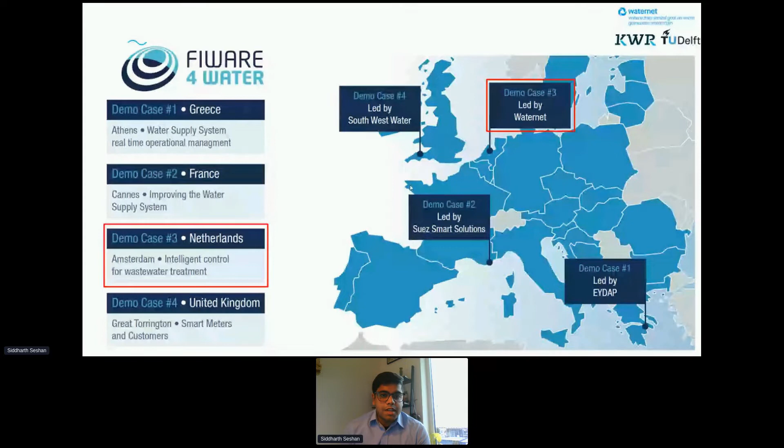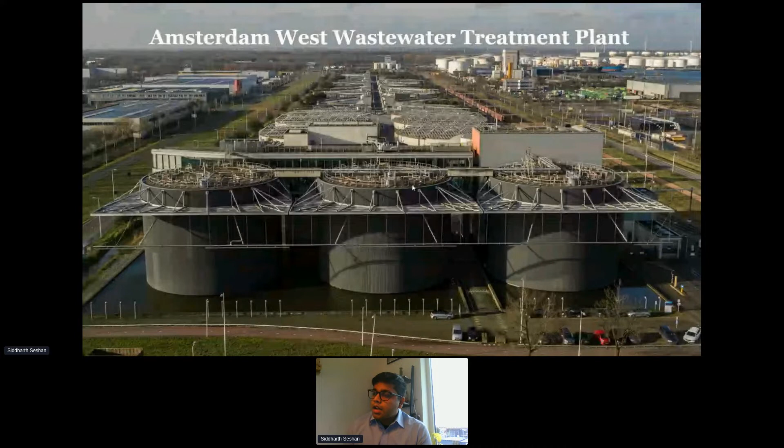So there it is, a large wastewater treatment plant. I'm sure many of you are also aware of this treatment process and system. To give background on the plant itself, it has a capacity of 1.1 million population equivalent, so it's quite large, with 7 treatment lanes within the treatment system.

The activated sludge process is a modified University of Cape Town process configuration. It's a unique plant because it also accepts external sludges from different wastewater treatment plants operated by Waternet, so it has to handle a lot more sludge than what is generated within Amsterdam West itself.

To promote and allow various research activities with various research goals, one treatment lane out of the 7 has been made available as a research lane by Waternet, where additional sensors are being deployed to test new smart technologies such as AI, to see how we can meet our goals.

One such goal, within FIWARE for Water as well as for Waternet and us as a project team, is to try and achieve the operational control of wastewater treatment plants in near real time, potentially to reduce nitrous oxide emissions, which is a very harmful greenhouse gas with a global warming potential 298 times more than CO2 equivalent.

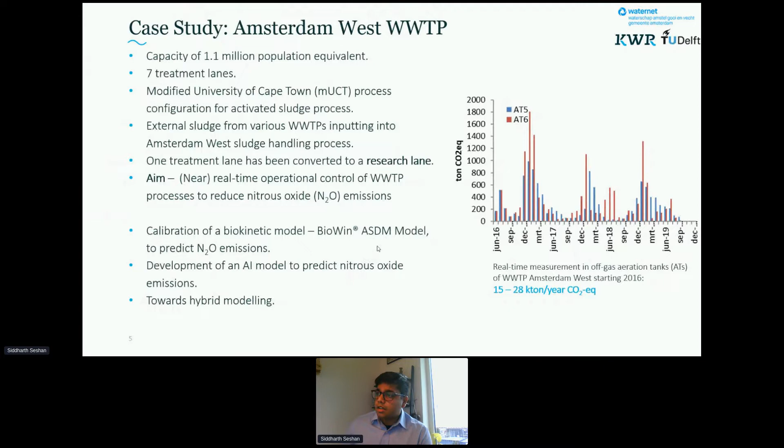So just to move forward with respect to the biokinetic modeling, prior for us to be able to do any form of simulation, we need to ensure we have the adequate and necessary data to be able to input into the model itself.

With respect to the characterization of the domestic wastewater of Amsterdam West, this was necessary to be able to acquire through a comprehensive and intensive sampling campaign. This was conducted in July of this year for 8 days during one of those sweet spots between lockdowns and regulations that were there for the COVID pandemic. So we were lucky to try and find this window.

A flow proportional daily composite sampling was conducted for the raw influent and effluent wastewater to monitor certain key parameters such as COD, total filtered COD, same for the BOD as well, total TKN, ammonia, nitrate, and the phosphorus species, as well as the solids.

The raw influent was also monitored for pH, alkalinity, calcium, and magnesium. And diurnal sampling was also conducted for the raw influent as well as the effluent specific to the research lane itself, so one of the 7 lanes.

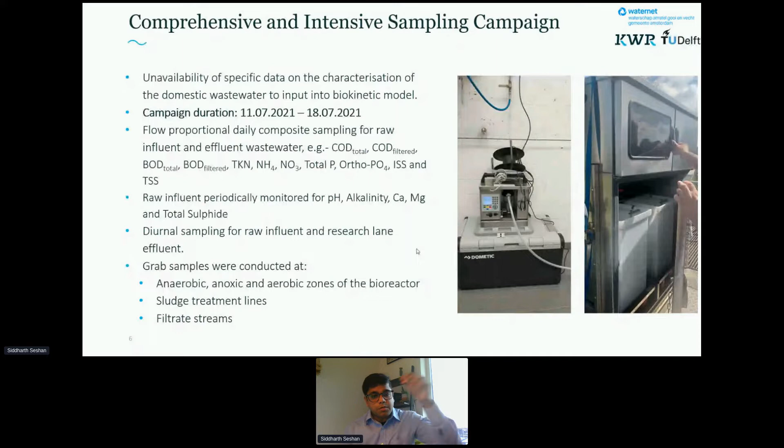And grab samples were also conducted in various locations in the treatment process, such as the bioreactor units in the anaerobic and anoxic and aerobic zones, as well as the sludge treatment lines, which is quite important as well, and even the filtrate streams, which is also providing certain wastewater characteristics back into the activated sludge process.

This is just to give an overview of the different locations that we tried to capture in our sampling campaign and monitor. So we had various locations from this aerial view shot of Amsterdam West. As we can see, there were quite a few locations in the sludge handling processes for grab samples, bioreactor units, the raw influent, and the effluent.

And more importantly, in the bottom left corner, you could see the external sludges. So we had the external primary sludge and thickened sludges from different wastewater treatment plants, as well as waste activated sludge that is inputted. So we also had to monitor these sludge lines to be able to understand what we can input into our model.

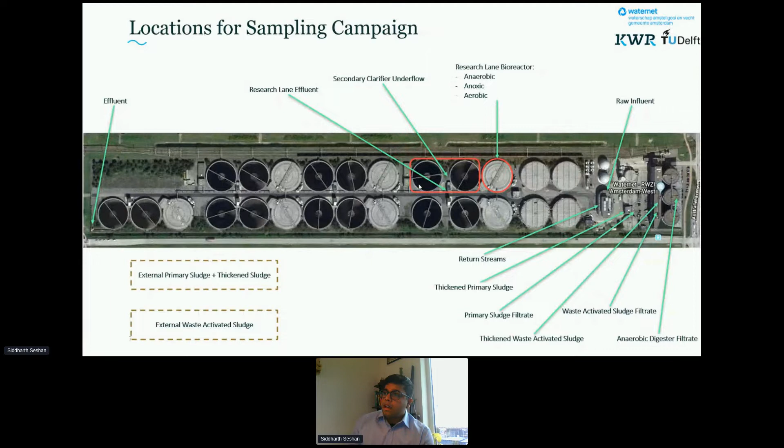Here's also another overview of the different various parameters that we also monitored. So it is quite an extensive list where we try to take as many, try and understand our samples as much as possible, gather as much information as possible to allow us to be able to input and as well as cross-check the outputs that we get from our biokinetic model.

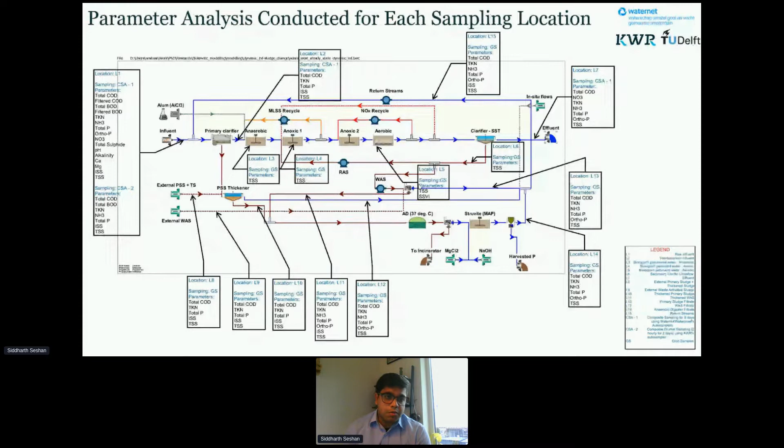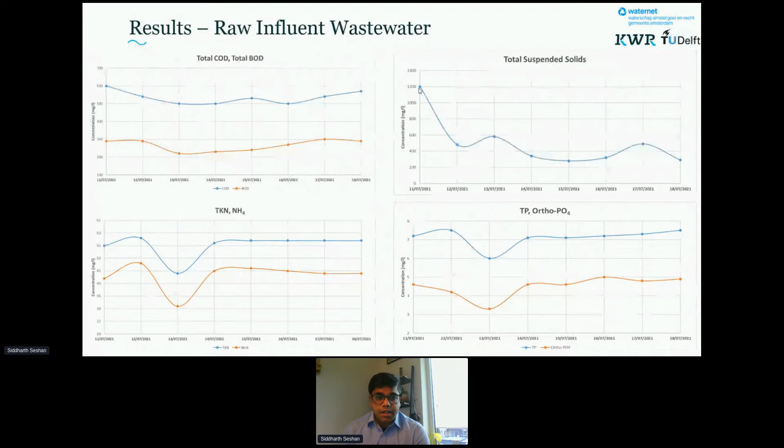Here's some figures on the raw influent wastewater from the sampling campaign. Barring some hiccups, which is bound to happen in a sampling campaign of this magnitude, where we did have some questionable values, for example, of the total suspended solids, as a whole, we believe that what we got is what we expected, and the data was sufficiently good enough for us to be able to perform the characterization of the wastewater specific to Amsterdam West, so that can allow us to conduct the modeling.

Now that we have the data from the sampling campaign, we can now do some modeling using the BioWin ASDM model. The sampling data, as I mentioned, was used to characterize the common quality parameters such as COD, TKN, and TP into their fractions. So now we have a list of the wastewater fractions that can now specifically be entered into BioWin that are specific and unique to Amsterdam West, the domestic wastewater of Amsterdam West, to be more precise.

The grab samples of the sludge lines were also used as input into the model, for example, in the external sludges. And it also was used to perform sanity checks throughout the sludge lines to ensure that the model outputs that we were getting from the simulations are somewhat in the range of what is actually what we see in the ground. Of course, the dimensions of the process units were also inputted for the treatment lane.

The recycled flow rates, so the MLSS recycles, as we can see over here, the NOx recycles, typical recycles that you have in an MUCT platform process configuration was also inputted. The liquid temperature was also inputted that allowed us to do season-based simulations. So we started off with doing the summer season to be able to ensure our model provides a good fit in that. And then we subsequently move to different seasons as well.

And we started off with doing steady state simulations, as is the practice prior to going forward with dynamic simulations. The recycled flow rates and the liquid temperature, for example, were inputted using online sensor data that is available in the Waternet system for the research lane.

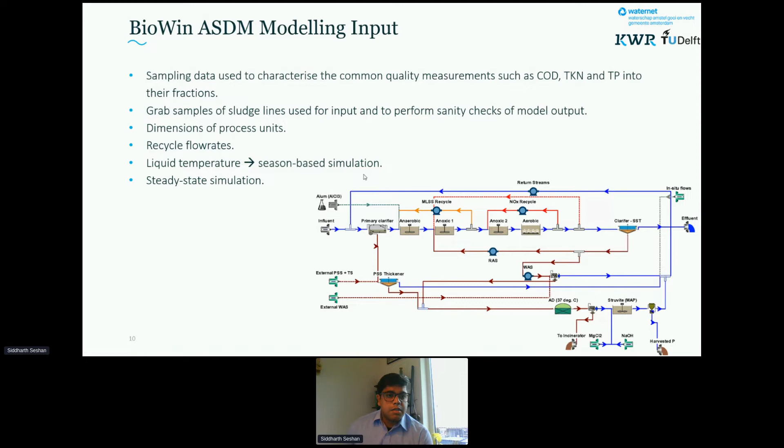Here are some first results of the steady state simulation that we did with the BioWin model. As I mentioned, the steady state simulations were conducted seasonally using historical laboratory measurements for calibration. We observed a good fit between the observed data and our model predictions for the various effluent variables during the summer season. This gives us confidence that our sampling campaign provided adequate data for characterizing the wastewater, which we can now use to conduct steady state and dynamic simulations for various seasons moving forward.

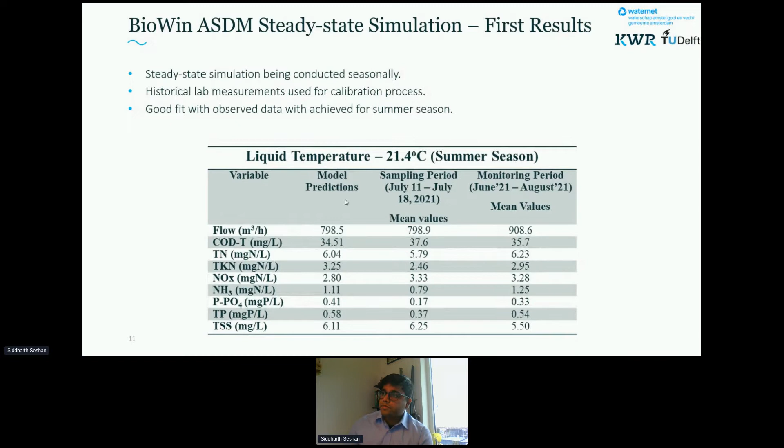To wrap up, an outlook on the sampling campaign itself: we conducted 8 days of sampling, balancing the costs of going too long against collecting sufficient data for a meaningful understanding of the wastewater in Amsterdam West. We also tried to increase data redundancy by focusing on various samples and locations, so that in case unforeseen situations arise, such as a pandemic, we would still have sufficient data points to continue the analysis.

Amsterdam West is a rather large plant with a lot of complexity due to external sludges, and a monitoring campaign of this magnitude was time consuming and complex, but it was a great learning experience in developing a framework for how to conduct such a monitoring campaign. The primary goal of characterizing the raw influent quality parameters with the fractions was achieved, allowing us to map it in the BioWin model.

For future modeling activities, we will continue doing steady state simulations for other seasons, and also continue with dynamic simulations using online sensor data now that we have the wastewater fractions. This biokinetic model, once calibrated, is a prelude to being calibrated on N2O, nitrous oxide sensor data, which will be followed by AI modeling of N2O predictions. Finally, investigations will be conducted on how to hybridize these models.

I think this hybrid model is very interesting. But can you also indicate what you expect as the crucial parameters to control or reduce the N2O emissions? What is your assumption prior to doing all this modeling? What would be your guess as to the crucial parameters?

Yes, very nice question, Huub. In fact, what literature has suggested, and what we are seeing, is that dissolved oxygen is a very important operational parameter, particularly the DO levels in the aerobic zones as well as the anoxic zones, because that gives an indication of which production pathway of the N2O is active. So controlling DO and understanding how it changes with respect to N2O production is a very key parameter for testing these strategies with our biokinetic model. I would say that's number one.

But after that, there are also other things sporadically mentioned in literature, such as the pH of the mixed liquor, sludge retention time, and so on. But I think DO is your number one go-to before you can start considering the rest.

So then you predict that the transition between the oxidation part of the treatment and the nitrification part, and perhaps also the denitrification, is crucial. So you have to maintain very sharp treatment conditions with respect to oxygen to limit the N2O emissions.

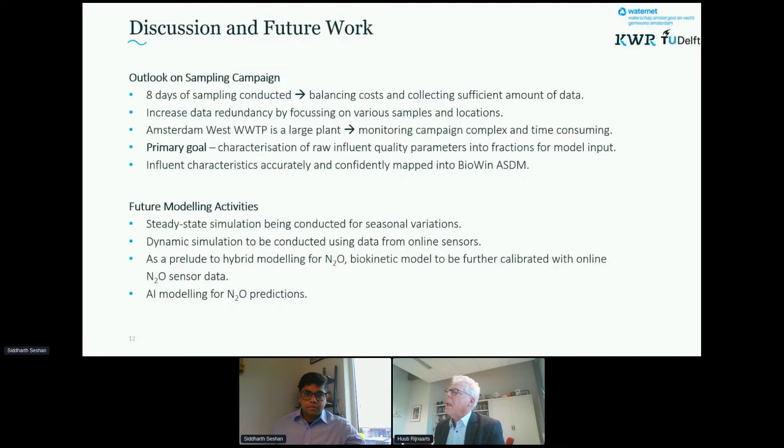Let me check whether there is something in the chat. I don't see yet. Maybe another question.

So you have, of course, N2O as one of the greenhouse gas emissions, but you also have methane and CO2. So you have the three major greenhouse emissions from wastewater treatment plants. Do you foresee that your hybrid model can be expanded to all the greenhouse components? Yes, I think so, because at least the biokinetic models are mass balance based. So you do have to account for this when you add the complexities for the other greenhouse gases as well. A very unique thing about Amsterdam West and what Waternet have done over there is they are also measuring the methane and the CO2 in the off gas. So there is data available to also extend past the N2O. But I think N2O is considered the most potent one to start with.

And then it will naturally be extended. I think there is scope for that, and also the indirect carbon footprint from the energy consumption as well. So this is also another important thing.

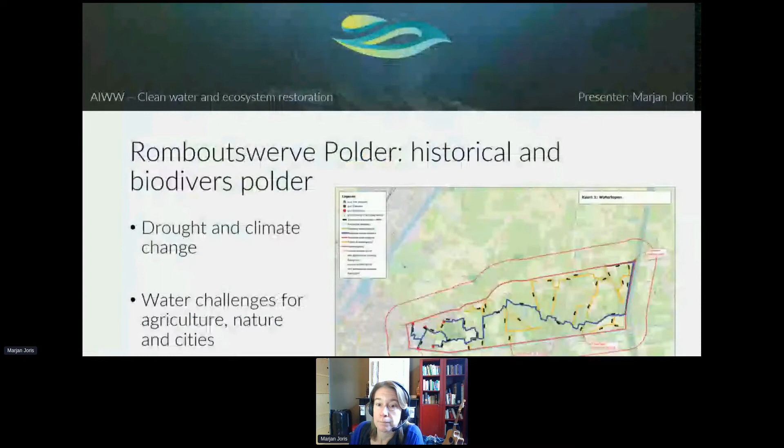The Romboutswerve Polder is an old polder or reclaimed land, limited by canals and crossed by different waterways. Although the canals can feed the waterways even in summer, drought is a problem in this area. Because of the low water levels, quality of the water can be poor, and the growth of blue algae does not allow taking in the water of the canal at all times.

We expect that due to climate change, temperatures will rise and there will be longer periods of drought. On the other hand, during heavy rainfall, water must be drained to prevent flooding in the upper urban areas, in the city of Damme, as well as the city of Bruges. Also due to climate change, we expect an increase in events with high to even extreme precipitation. So the possibilities to retain water in the area are limited.

At the moment, the water system is disturbed, and even in winter, there are hardly any puddle and swim conditions, which is crucial for the meadow birds, and the population of these birds is drastically decreasing.

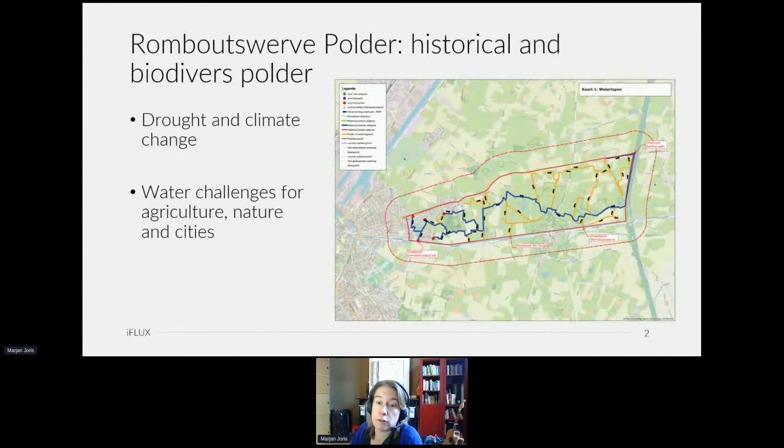To counteract the effects of drought, the aim is to raise the water level, although more is needed to come to a sustainable water management that's optimally attuned to nature, but also agriculture, and to prevent or avoid flooding in the urban areas.

The aim is to optimize the water management in the Romboutswerve Polder, tackling the challenges of drought and flood, realizing a climate-robust and optimally functioning water system in connection with agricultural land use, conserving biodiversity and water experience, promoting good water quality as a precondition for top international nature and as an indicator for sustainable agriculture management, preserving the cultural historical landscape, and promoting added value through smarter management and exploitation in a climate-robust and biodiverse way.

So the pilot monitoring network helps to collect and exchange knowledge about the complex water system. Where in the past, monitoring was limited to measuring the effects at the surface, we want to visualize what's happening in the underground by measuring the groundwater flows and exchange at the interfaces of ground and surface water, but also of precipitation that goes through the groundwater, etc.

By monitoring, we like to organize a collaboration of partners and an interactive project approach with various stakeholders. The focus is on differentiated water level management and innovative water retention and infiltration initiatives, distinguished in design, technology, and the target audience.

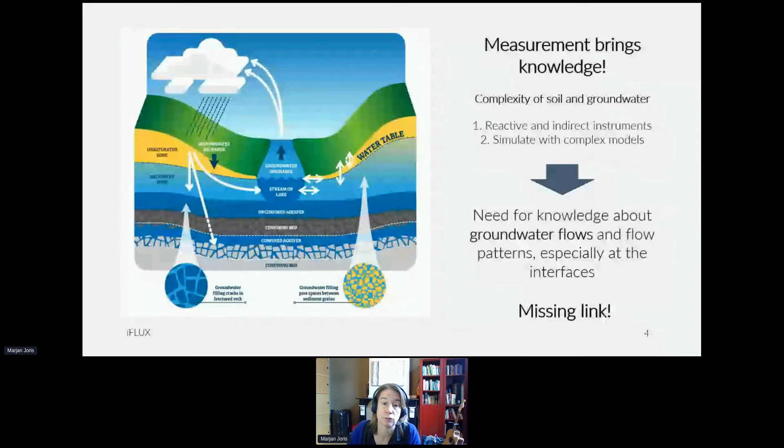With iFLUX, we provide real-time data of groundwater and contamination flux. It all started a while ago, around 2007, with a PhD about spreading of contamination in groundwater. It's a PhD of our founder, Goedele Verreydt. And out of that PhD, iFLUX was born.

We have done more than 100 projects investigating the fate and behavior of contamination in the groundwater. Based on this experience and the questions of our customers, we developed a digital smart groundwater sensing probe, including a unique sensor flow chip inside.

We are able to measure continuous groundwater flow rates. We measure specific low-flow groundwater ranges down to the centimeter scale a day, typical to Flanders, but also to the Netherlands and other areas with typical low flows in groundwater.

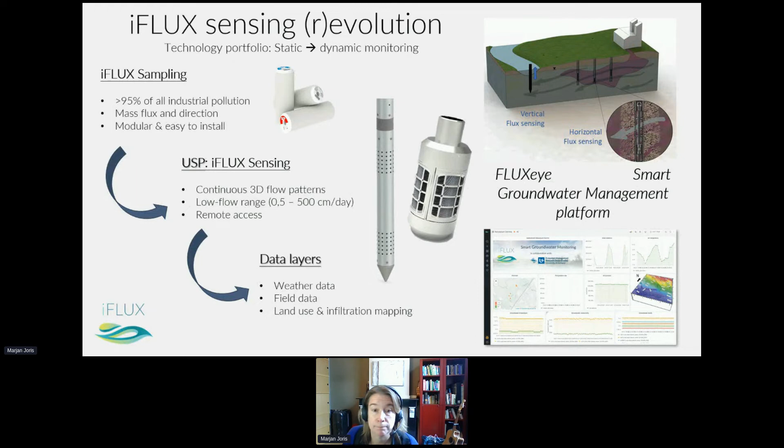So here you see our vertical sensor probe. In the sensor probe, there is a microfluid chip with a small sensor capillary measuring flow velocity based on temperature in a closed well system.

The sensor is built in a probe, and the probe has two filter areas, provided with a fine mesh to prevent clogging. The probe can be installed directly in soil or in a specific well, allowing measurement of the vertical flow.

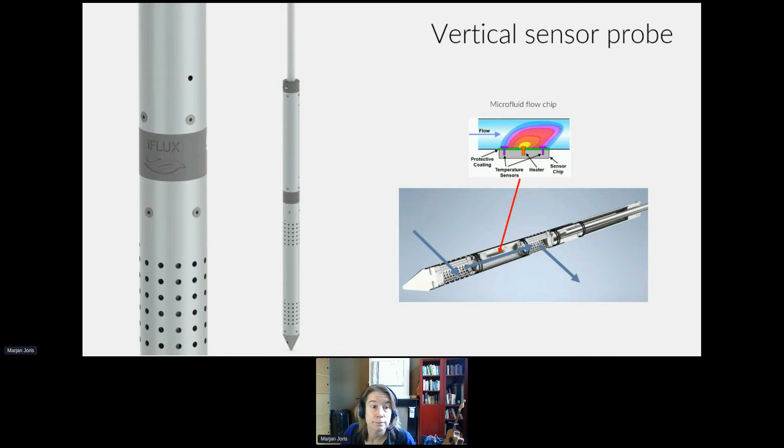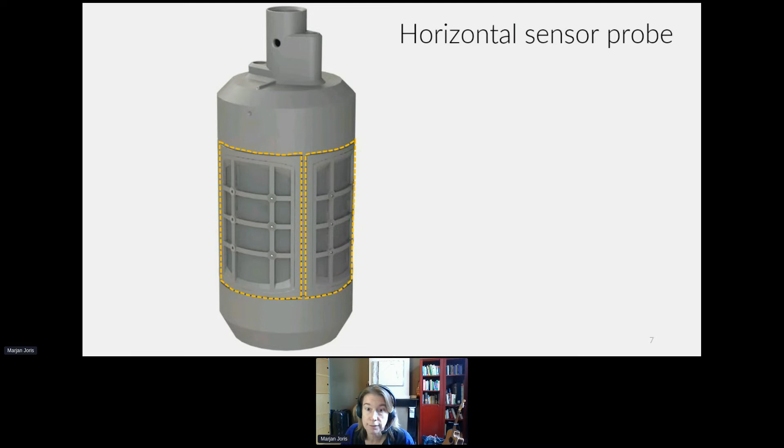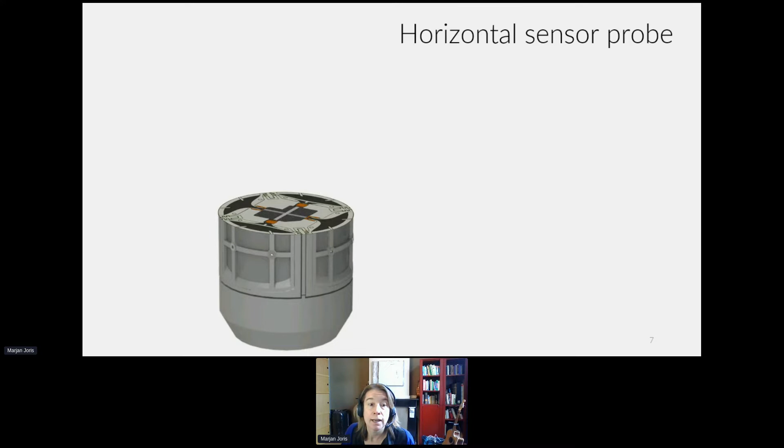Here you see our probe for measuring horizontal groundwater flow. These are the meshes where the groundwater flows in, and if we open it, you can see there are two sensors perpendicular to each other. Those two sensors allow us to measure the flow velocity, but also, based on the vector sum, the direction is determined. And this probe, as you can see, voila.

This probe is installed in a well. For the best results, we prefer to use our own specially designed pre-pack filter, because that way the flow is optimally controlled.

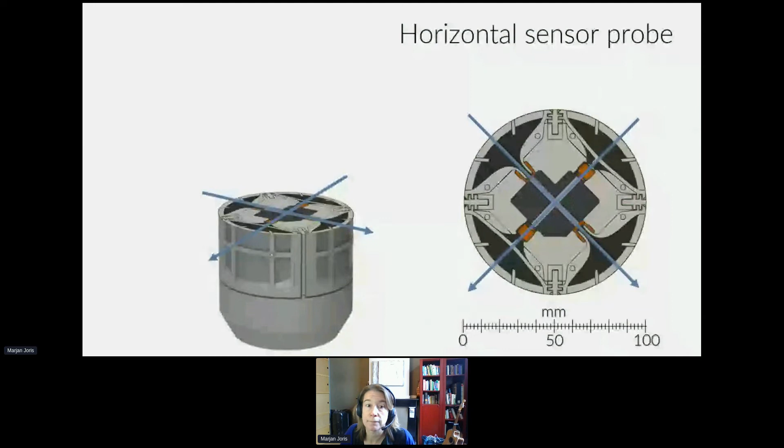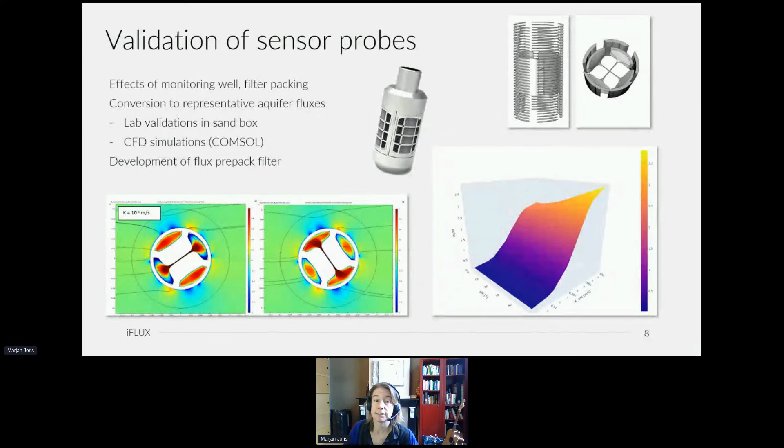To determine the flux in the aquifer, the sensor measurement is converted based on the characteristics, the conductivity of the aquifer, the well, and the probe. A correction factor is calculated, and for this, controlled lab tests are executed in a sandbox. And because of the limitations of lab setups, additional CFD simulations are done in our digital lab.

To come back to the pilot in Damme, together with Natuurpunt and the University of Antwerp, we set up a first monitoring network to create a better understanding of the water system, to restore wet grassland and swamp forest, preserving and restoring biotopes.

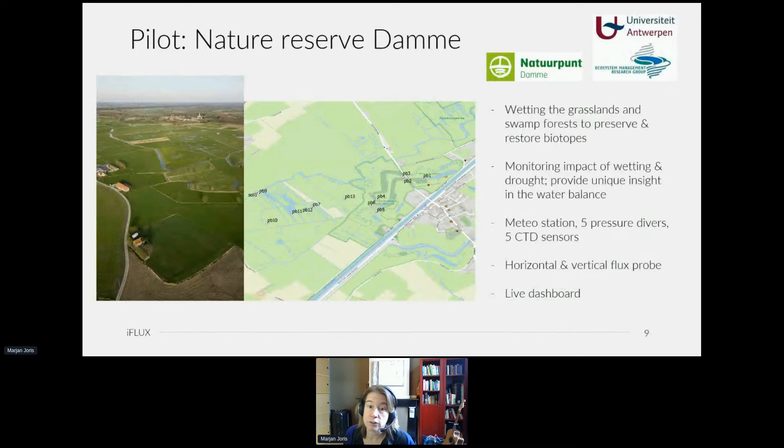For this, we installed a meteo station and 5 pressure divers and CTD sensors, a horizontal and vertical flux probe, and all data are sent to a real-time dashboard.

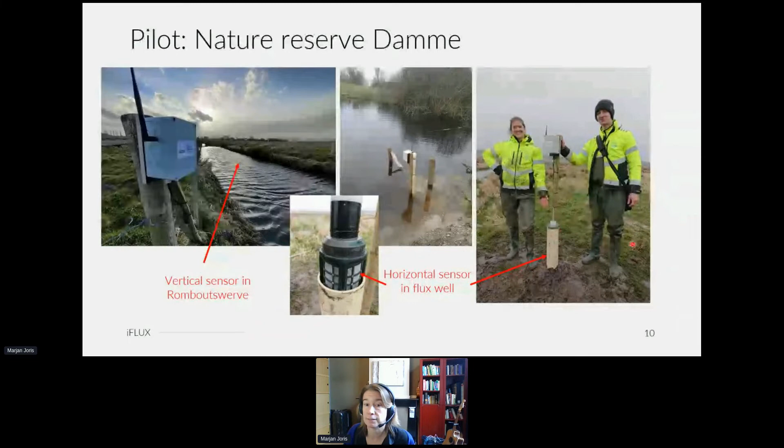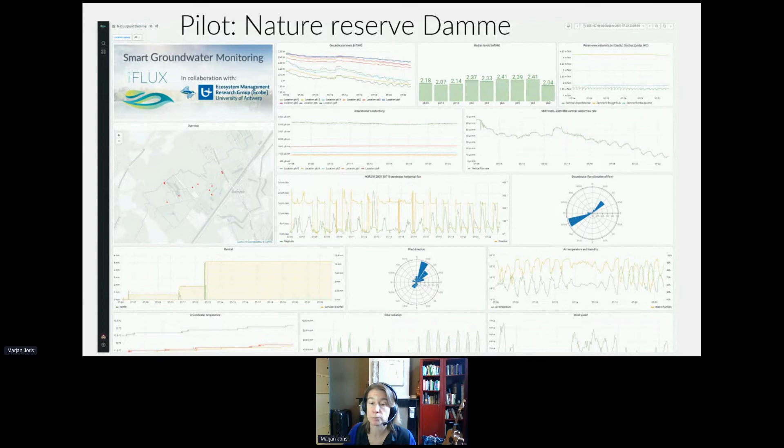We combine those data with the information from the weather station, measuring solar radiation, wind, humidity, and precipitation, and we combine our own measurements with available data of level measurements in the water base, which we download from waterinfo.be. So let's come to the first findings of our pilot test.

We see a variation in flow velocity and also in direction. It's not a surprise, of course, but in contradiction with expectations, the change is not directly related to the tide, or not only related to the tide. We see only one change in direction a day. If it were related to the tide, we would expect more changes a day. It's more a day-night related change.

Further investigation is needed to find out if there is influence of evapotranspiration or maybe the nearby canals. We also see that with the change in direction, the vertical flow respectively increases and decreases.

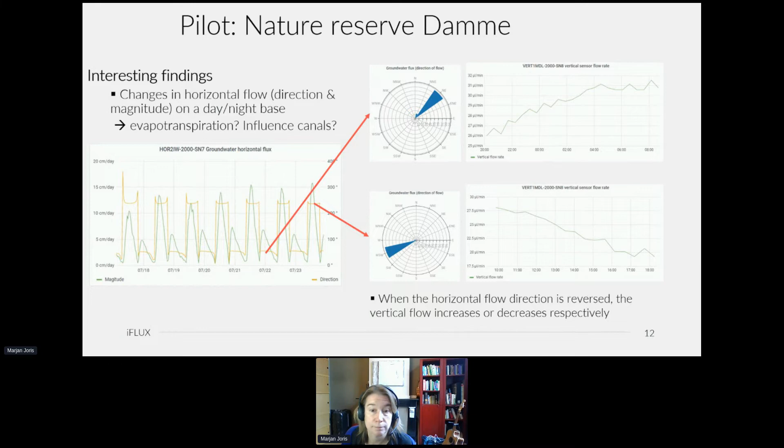Okay, and here you can see for the vertical flow, there is an increase and decrease, but we see there is always a very strong natural exfiltration. We notice now that this natural exfiltration is much higher than the water artificial discharge supplied by pumping.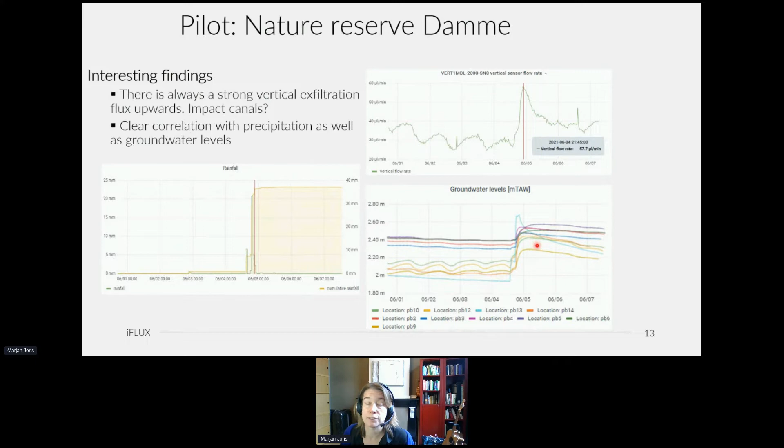The exfiltration is clearly correlated with the precipitation. You see precipitation, and we see an increase in the vertical flow, and also correlated with the measured groundwater levels on site.

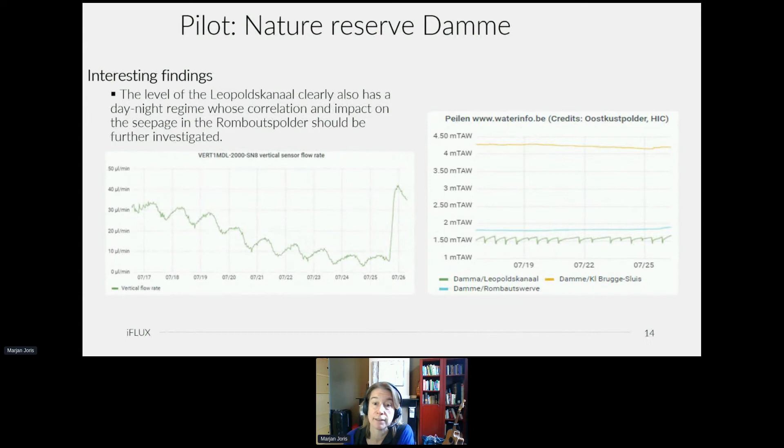And we see that the changes in the vertical flow are very similar to the level variation in a canal further away, where water is discharged to keep the water level high. It's in the Damme Leopold canal. We can see it here.

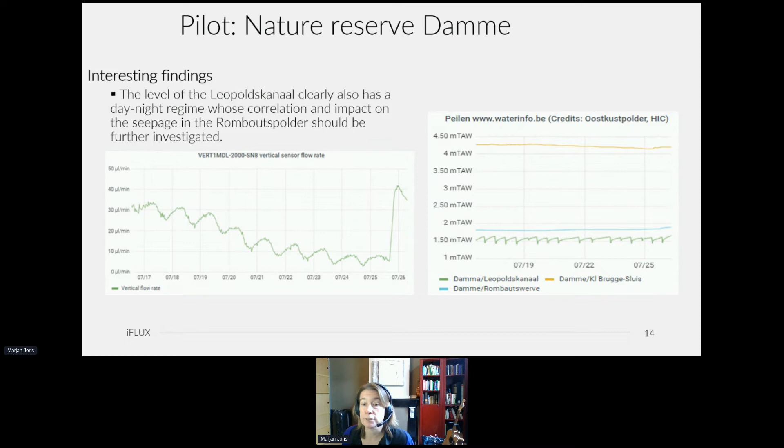While we don't see the variation in the nearby canals, here in the Canal Brugge-Sluis or in the Romboutswerve, we don't see the variations. So the seepage from the Leopold Canal to the Romboutspolder should be further investigated.

Thank you very much, Marjan, for your nice presentation on a polder in Belgium. I would again invite the audience to raise any questions if you have for Marjan. At the moment, there are no questions yet, so I have a question to start the discussion.

So you are completely oriented with your sensoring on water quantity, the water quantity flow modeling of the system. Do you envision also that these sensors can be expanded to sensors that are also able to pick up water quality parameters like salinity, nitrogen and phosphorus, because these are important parameters for the ecological and agricultural quality of the system?

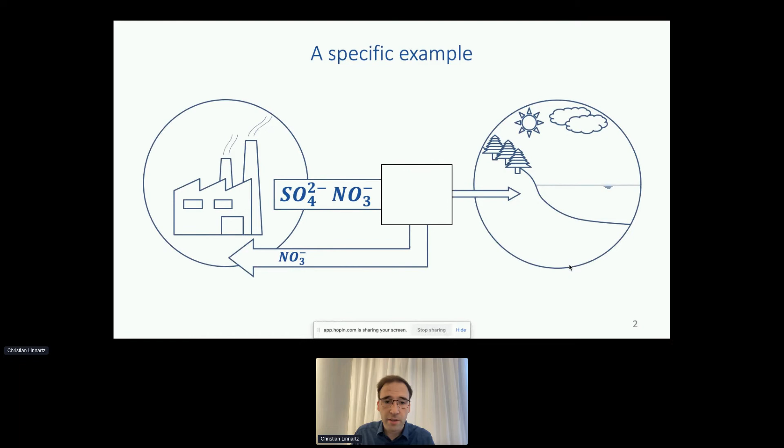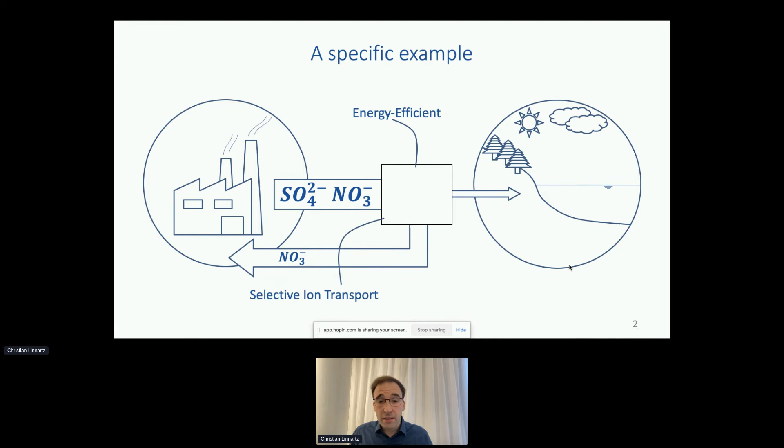The question is, how can we feed those back? And sometimes you don't just want to feed back those ions, you want to select the ions—separate sulfate and nitrate, for example, under these conditions. This should also be energy efficient, as we all know, because that's what drives our industry. We need this kind of selectivity in the system, in the black box I'm showing here, to separate, for example, nitrate and give it back selectively, and then go with the sulfate in a separate step, or give it back to the environment or to another industry.

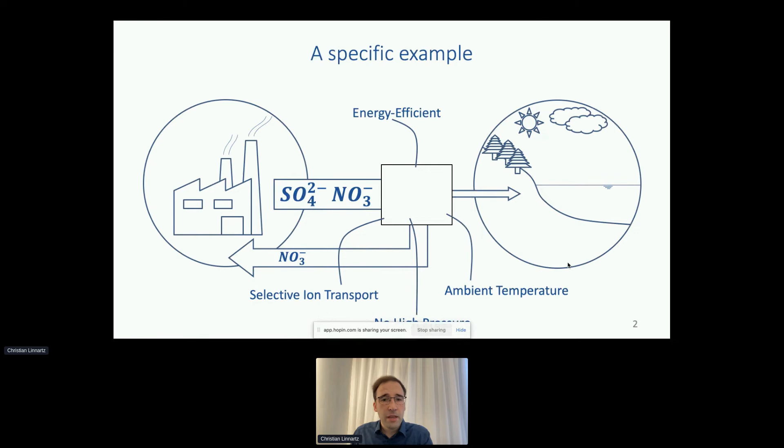This should also usually be done at ambient temperature, mainly due to the cost of high-temperature systems, and it should also be with no high pressure—which, in the specific case we have, is an industry project on biosecurity regulation. When we think about that, we need to think not just about selectivity and energy efficiency, but also about robustness.

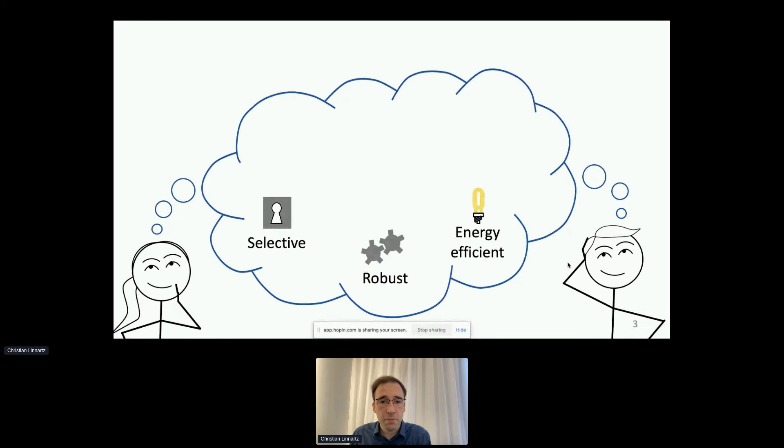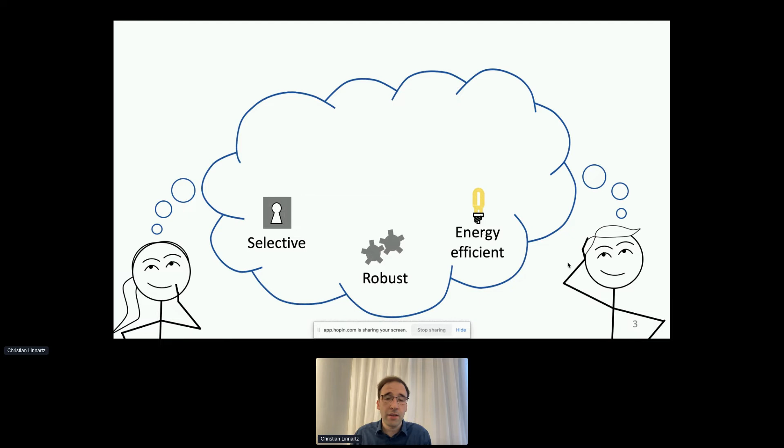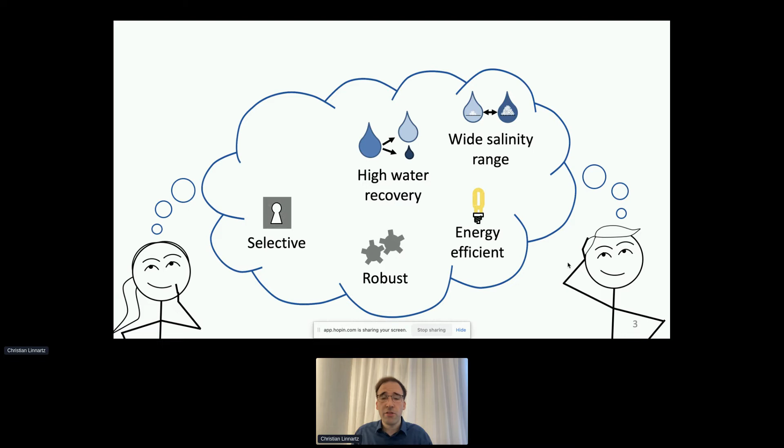We were talking about the big plants before, and you all know that when we work on such a system, it's not just about being in the lab—it should also go into industry, and there it should run like in a sewage plant for years and years, staying stable for a long time. What we always want is a high water recovery rate so we can harvest most of the system, which also goes hand in hand with a wide salinity range. Our target is to go from very low diluted wastewater streams, take back the valuable salt, and concentrate it as high as possible so it can easily be reused as feed for an industry process.

That's a key factor here: the whole system should be continuous, so it runs as the industry goes, on a flat curve forever and ever.

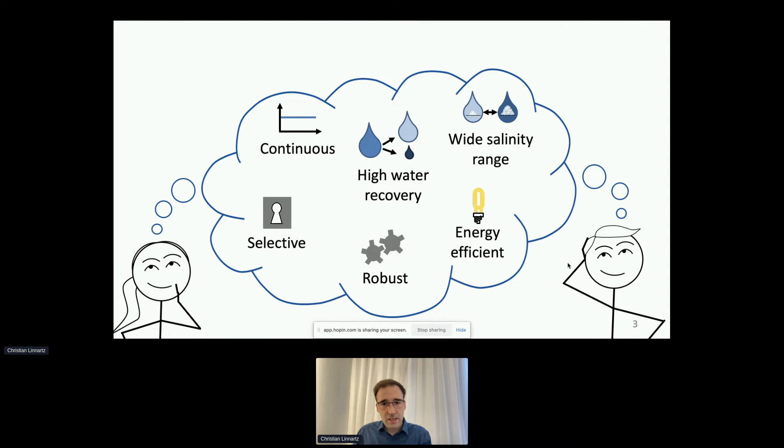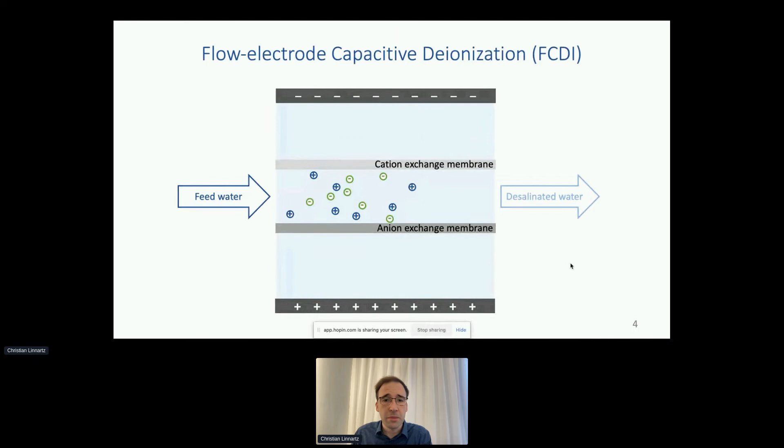So how does this system actually work? What we do is flow-electrode capacitive deionization. We have a salt solution consisting of ions in an electric field presented by two outer current collectors. We also introduce ion exchange membranes—that's where our basic knowledge from the chair I'm from comes from. We also introduce, on the outside, what we call a flow electrode—basically a solution of activated porous carbons with a huge surface area in a water solution. When we apply the potential, those ions move toward the counter electrode, similar to any other ion exchange membrane process with electric fields.

However, what happens then is that those particles actually come into contact with the outer electrodes. They get charged themselves, and thus the ions absorb onto those particles. So we end up with two, or basically three, streams: one stream with desalinated water, one stream where the flow electrode is charged just with cations, and another where just anions are present. That's also a uniqueness of this process.

So we can start thinking about mixing several systems and several ions and reversing this. When I talk about reversing, that's done in a similar system by just reversing the outer potential, forcing the ions back to the inner channel, giving us a concentrated solution. That's shown here on the left, where we see schematically those two modules—we go from a feed to a dilute stream, and we also go from a feed to a concentrate solution.

On the right, you can see a typical system, here shown as an example for sodium chloride. Most of you know numbers with that. We have a feed solution, for example 60 grams per liter, a typical industry waste solution. And then we want to go to a dilute as low as 3.5 grams per liter, but at the same time concentrate in a single step to, let's say, 250 grams per liter in the concentrate, or even higher depending on the system.

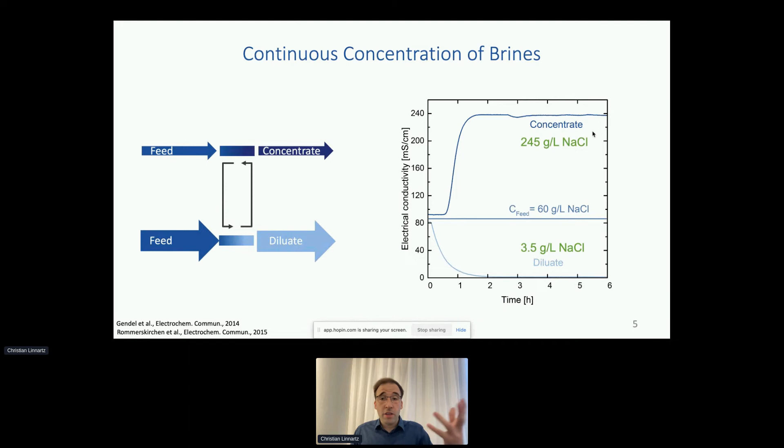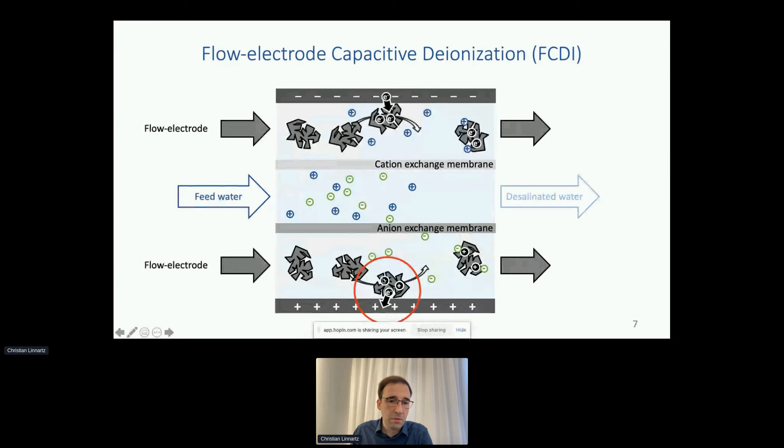And that's why we were thinking about how to move on. One key factor now of this whole system is what happens in the lower part, where you can see there is some interaction needed. That's a key part of the system - we get energy in terms of electrons and absorption of ions in a very good manner, which makes the system more efficient.

And that's where we thought, okay, let's turn this diagram 90 degrees. We have two pathways: one pathway for the electrons, one pathway for the ions, in this very simple channel. This separates the two layers. And we thought, can we go...

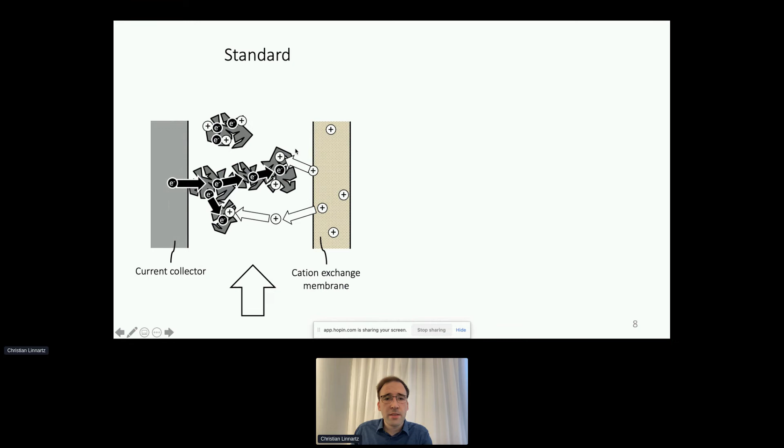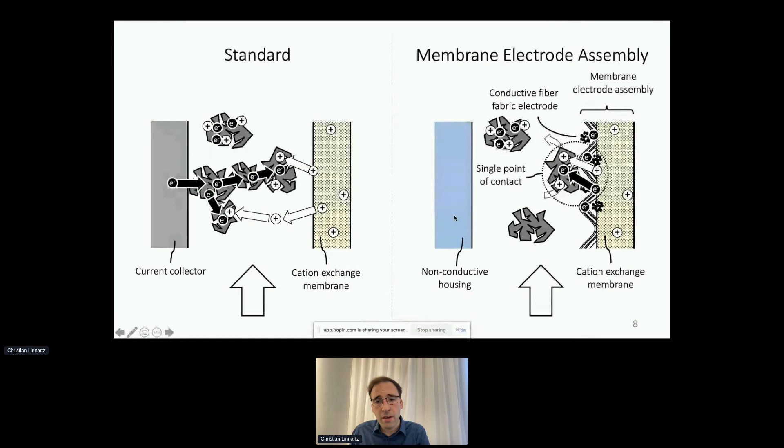...a little bit smaller and go for membrane electrode assemblies, where we actually apply a conductive layer of carbon fabric directly on top of the ion exchange membrane, creating what I call a single point of contact, where ion absorption and electron transfer happen at the very same spot. This also gives us new opportunities for the housing, which might now be non-conductive and flexible.

That's actually what we started to produce, and also published and patented. So we now make these membranes. We can see also that it works as a functional reinforcement, so even when the membrane swells, it doesn't detach. It's long-time stable and gives a certain strength to the material.

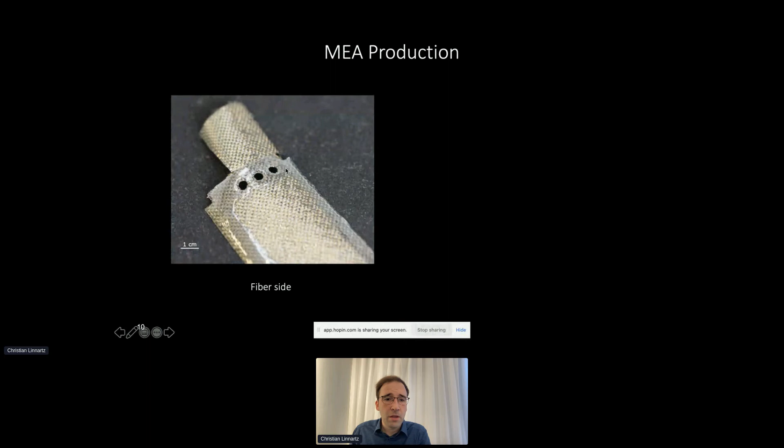Then we usually need to apply a sealing on the outer side. You can see this from the front and back side, and a detailed view here, where we have the feeding solution, and then it goes basically into plate and frame modules, as most of you know. A further step is that we're not stuck with this size, which is 40 square centimeters membrane area - we can now also produce a membrane area of 320 square centimeters, which is now our standard size. Knowing all that, we're now stacking plate and frame modules to get a larger system.

Coming to the conclusion, I hopefully showed you that we did a lot of basic research on this technology. Today I talked a little bit more about the application side. There are many applications we're targeting, which you can see and maybe read in our publications.

Applications should include any kind of recycling of valuable salts. We are, for example, working now on lithium recovery in one project. We are also working on treating high solid salinity wastewater from the dye industry and textile industry, basically.